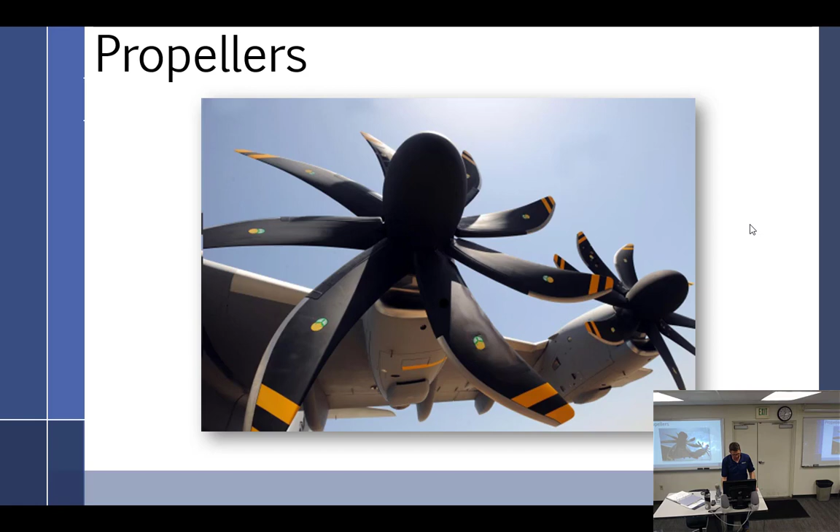We should do it like this. This would be almost fun. So I've never done it before like this. It's hard. Thrust depends upon speed and angle.

Let's see. Thrust depends on the speed and angle at which the blade strikes the air. The angle at which the blade strikes the air depends upon the speed at which the propeller is turning, which would be RPM.

The speed the machine is traveling, airspeed, the speed at which the machine is traveling forward, and the speed at which the air is slipping backwards - that's reverse air. Any one of these changes, it changes the rest, as they are all interdependent upon one another.

Well, that was kind of cool, I guess. But anyway, which is to say that it's a lot more complicated than you're going to think it is. So if you try to make it real simple, it's not - it's going to be complicated. But that's not a big deal. You can just kind of grasp it and go, oh yeah, that is complicated. I kind of see how they're all interdependent, and then you're going to be kind of good.

So let's back it all on up and talk about propellers. Let's talk about the nomenclature. I should define a propeller. What is a propeller? The spinny thing out front. Horsepower to thrust, something like that.

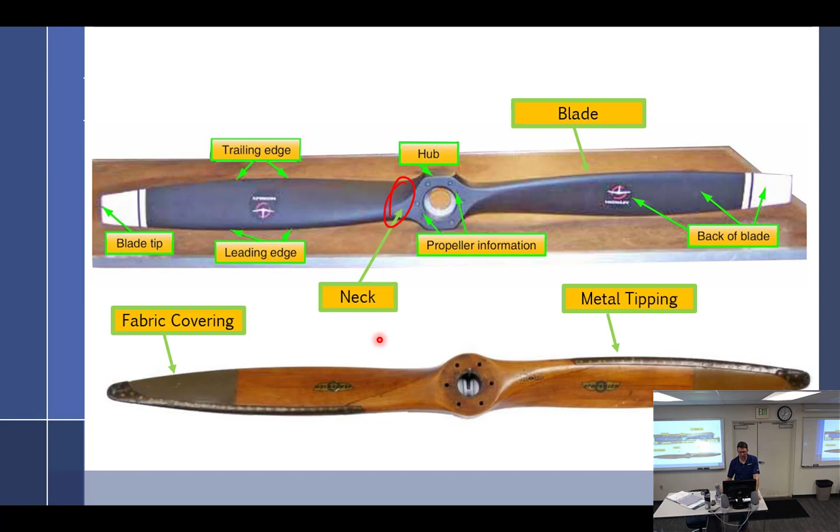I'll get my shit together in a minute. All right.

Oh, it even says it - fabric covering. So they often have fabric covering down here. It stabilizes the tip. I have a little video we'll watch. Has metal tipping - what's the metal tipping for? Debris, debris hits rocks and stuff, protects the wood. It is riveted or screwed and soldered on top to safety it, which we'll talk about that, or possibly nails.

On the metal propellers, we always have a high colored tip. Anybody know why it's high colored out here on the tip? So you can see it. Well, that's what I've got an idea. Yeah, it's how much you can shave it down. That is a great idea. So it's color coded right there for two reasons. One, that's how far you can lose a tip without it affecting you. No, it's not true, that was pretty good though.

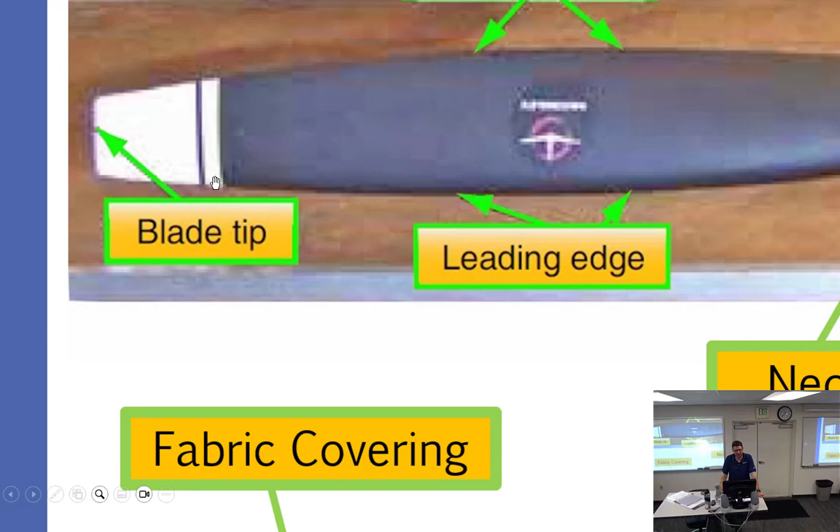No, actually, you ever heard the story about Henry Ford and his Model T? You could have any color you want as long as it's black. And why was that? Production line, cheap production - it was cheap.

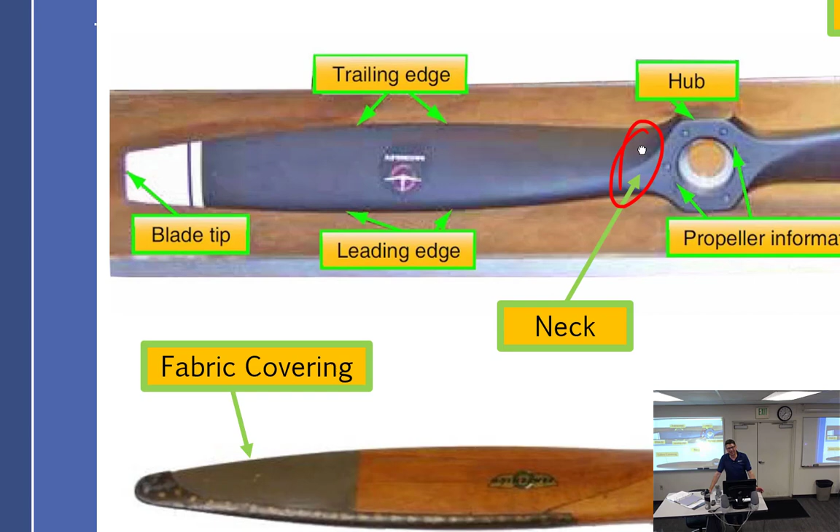The thing about black paint, which was cheaper, is it doesn't stick as well. It didn't have the same adhesion qualities as other colors, though it dried faster. For a car that's not a problem, but for an airplane propeller spinning at a thousand-some odd RPM, centrifugal force causes that black paint to slide off. In the olden days, you'd run the propeller for a couple hours, the paint would start to slide off, and you'd have to trim it and repaint the hub where it started sliding down.

So as technology got a little better, they figured out to paint the tips with a brighter, high visibility color that had better adhesion qualities. That would keep the black paint from sliding off the tip of the propeller, so you didn't have to repaint the hub all the time. You put the white paint on first, and the black paint butts up against it, and it just works.

That's total BS. There's nothing about that that's true.

Well, I hope that's on the test. That's the only part I'm going to remember.

No, why are the tips painted white? So you see it, so you don't walk into it, hopefully. It's a high visibility color so you don't walk into it. Then why don't they paint the whole thing white? Why do they paint the other part?

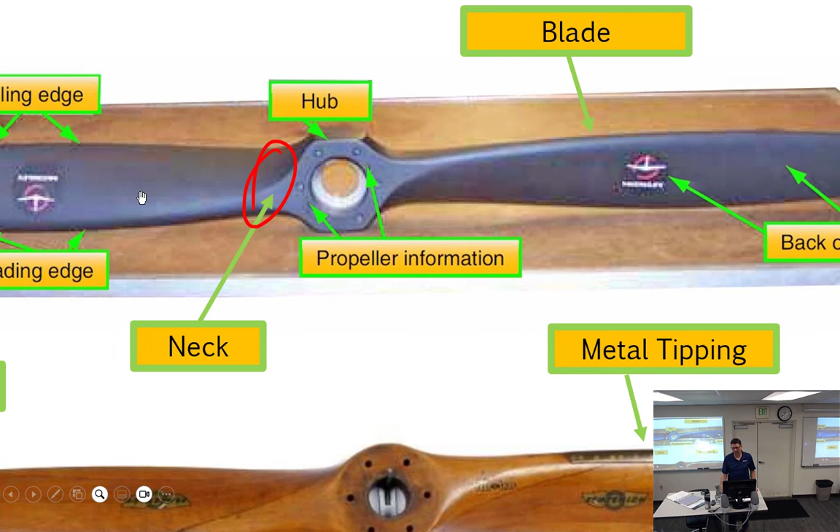Okay, so this part we're looking at is the back of the propeller. If I flip it over, the actual front of the propeller is called the face. The face is the part that faces the pilot. So why is the face painted black? They're always painted flat black - it's hard to see, to reduce glare for the pilot. And you don't even have the white tips on the face side.

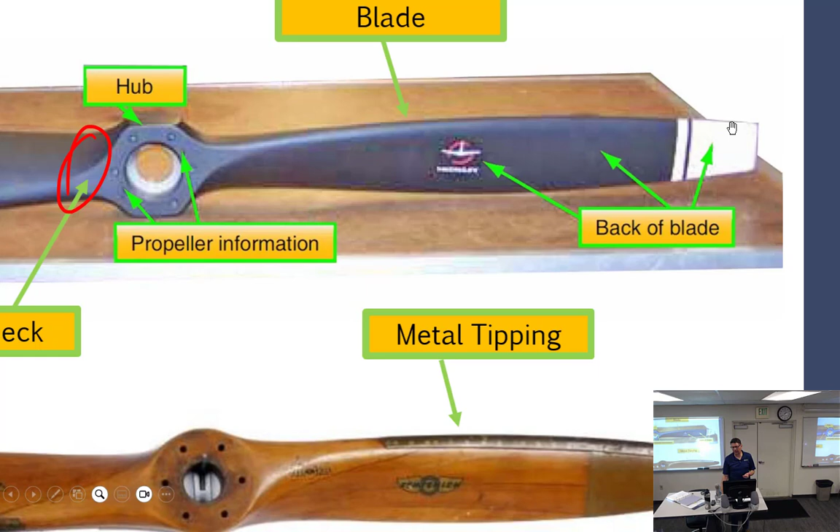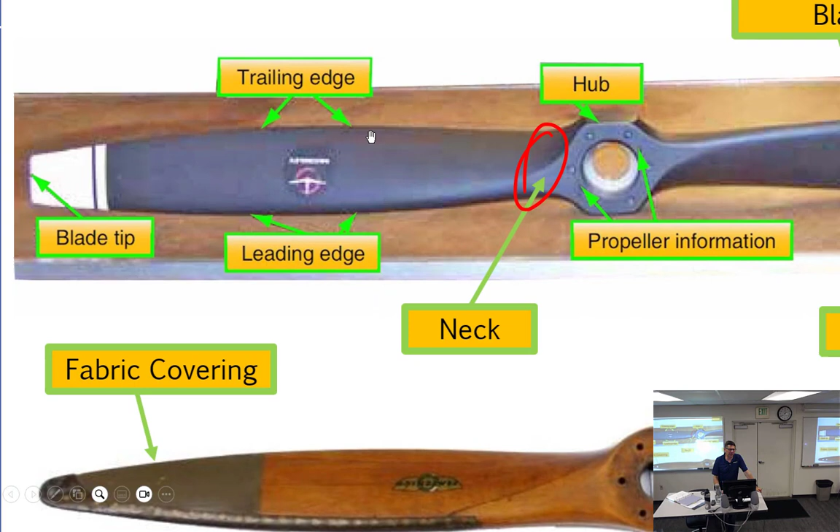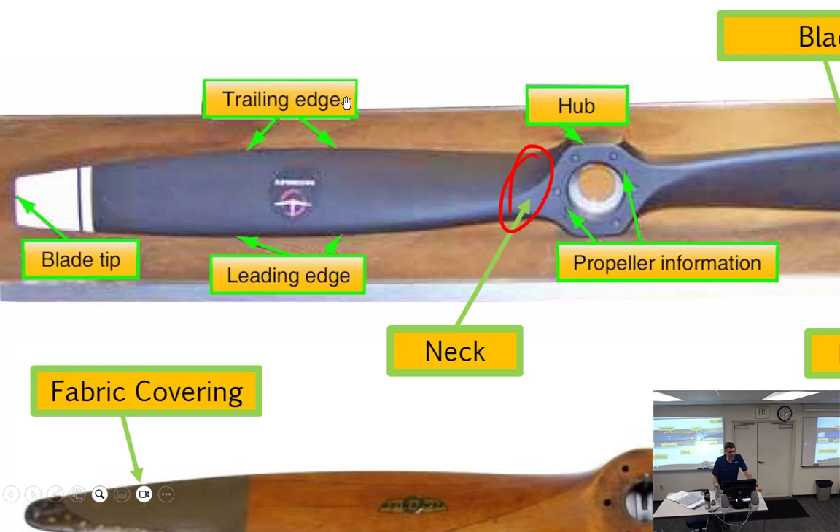I think there's some drawings in the book showing the white tipping on the back. You don't get it - it's called flicker vertigo. I had never heard of flicker vertigo until I had a customer, a crop duster, who ran it through a barbed wire fence and it scratched the hell out of his propeller. He flew it home and said, I got flicker vertigo. I'm like, I don't know what that is. Then he said, back in the old days, you'd go to the picture show, the talkies, the silent films.

When you're watching a film, it's frames, right? And if the frame rate isn't right, it makes you sick from the flicker. So when they first came out with these movies, people would get sick from watching it.

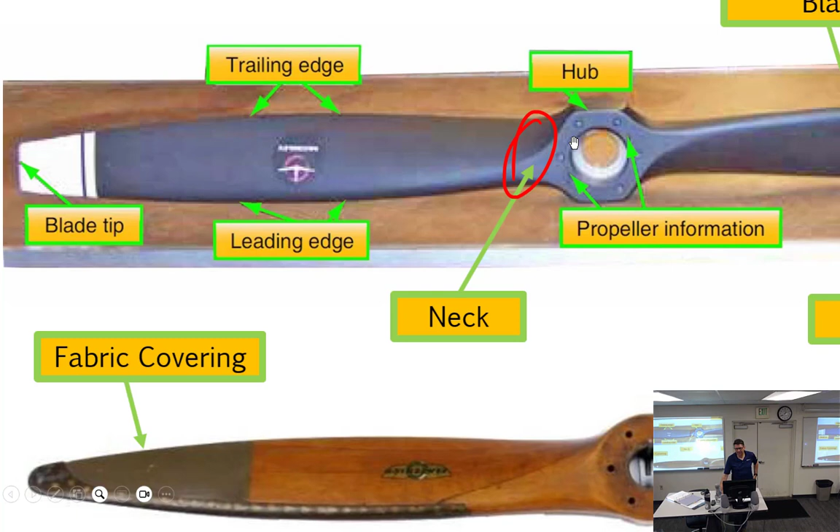Flicker vertigo - is that also real? That is real. Pokemon was like that. Yeah, they came out with an episode like that.

Everything except the paint sliding was true. Well, we were cold - I wouldn't lie to you guys.

All right, nomenclature, things we talked about. We have the blade - you should know what the blade is. We've got the neck, next to the hub. Next to the neck is the hub. What's inside the hub? The hub bore. It's a funny name to say. And we have the bolt holes.

Bolt holes are kind of a big deal - if you're going to get a crack, it's likely to start at the bolt hole. They're a big deal, especially in wood props. You can't have them elongated, or the prop will have play to it. That'd be bad. We have the leading edge.

The leading edge goes forward and into the wind. Wood props - I'm going to say props instead of propellers to save time - have metal tipping.

The metal tipping protects from rock chips. Maybe also rain - I hear when you fly into rain it's really hard on a propeller, so it protects against that too. I'm not that familiar with it getting past the lacquer into the actual wood.

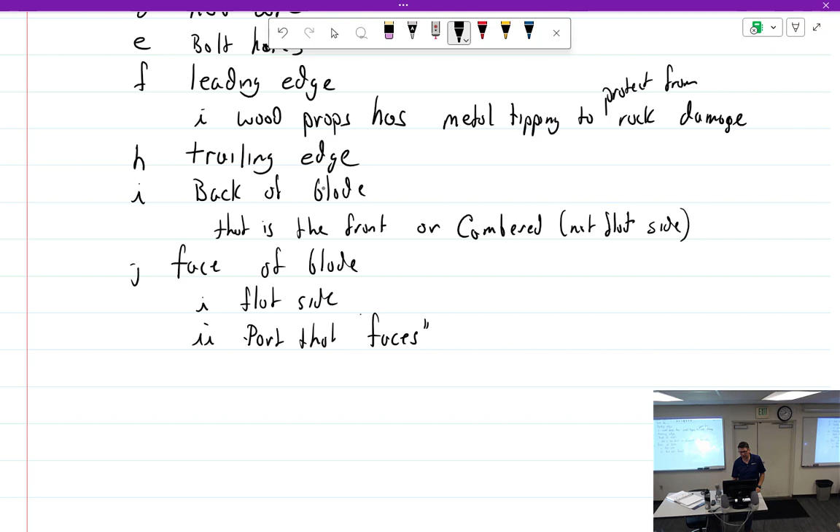Assuming it's a tractor type, meaning the pilot's in your front. If you have a pusher type, it's in the back. I guess it still faces the pilot, kind of. No, because you'd have to get out, walk around, and then face it. It faces the back of the pilot. Yes.

The blade chord. What is the blade chord? Leading edge to... the imaginary line. I don't know why it's imaginary, it's a real line. So it's the line between the leading edge and trailing edge.

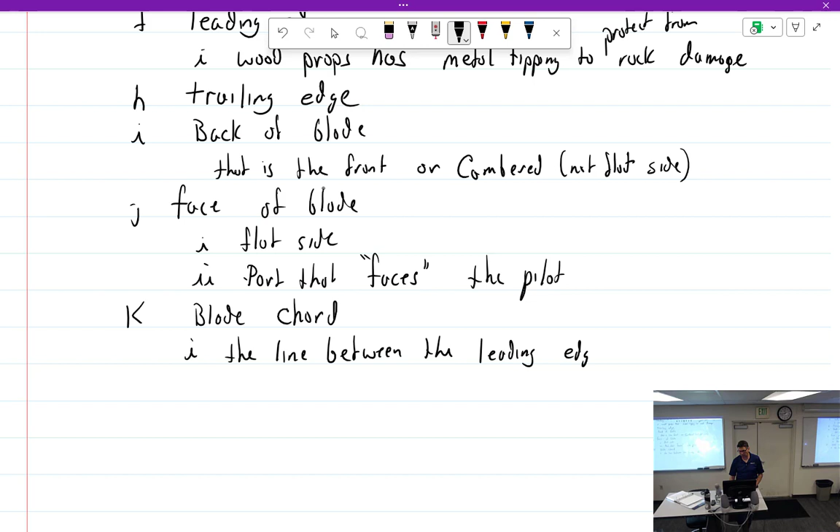Where else do we have a chord line? Wings—between the leading edge and trailing edge. I remembered it.

Blade station, that is a distance. Well, it's always been said in inches, but we're getting more into the metric system with blades coming out of Europe. I wonder—I haven't read a manual for that. It would seem like it'd be in millimeters or centimeters. A distance in inches from the center of the hub.

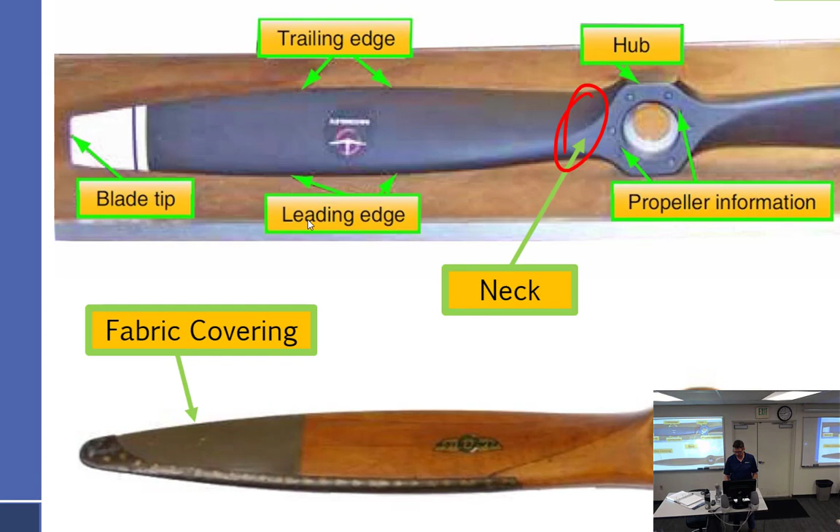Should do more. All right, blade stations. So I have all... oh yeah, we have the blade butt down here. That's the blade butt, but these are removable blades—we're talking about fixed pitch. But if we had a removable blade, then it has a blade butt.

Each station is a number of inches from the center of the hub, which is not shown on this picture because it's the actual blade that's been taken out—constant speed blades, they come out, they're not one piece. Then the blade center would be away from it—we'll get into that later. So anyway, we have a station that is number of inches past the hub centerline.

All right, prop theory. So as Orville said, a propeller is a rotating wing. We know how a wing works, right?

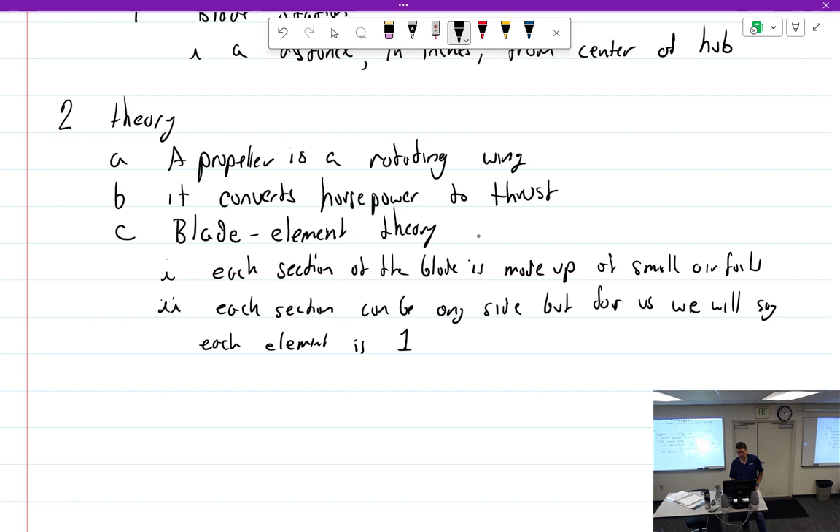Each section is of the blade. The blade is made up of small airfoils. Each section can be any size, but for us, we'll say each element is 1 inch.

The theory states that many airfoil sections or elements are formed together to create an airfoil blade that can create thrust when rotated around a central plane.

Each element is designed to operate at its best angle of attack since each section moves at different speeds, which is a weird thing. Wait a minute - what do you mean each section moves at different speeds? It's all moving forward at the same speed and going around at the same RPM, right? But as you get air further out, each section is going at a different speed when you clock it around this way. The tips are going faster.

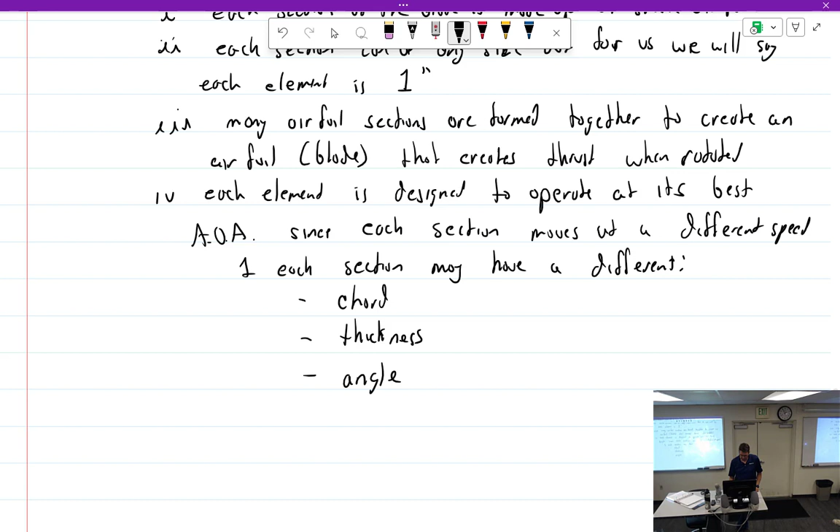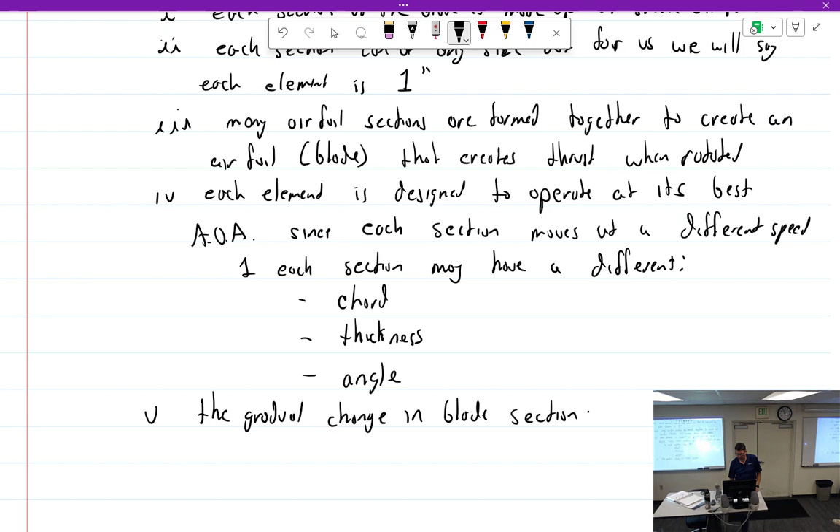The gradual change in blade section angles is called pitch distribution, which is the noticeable twist in the blade.

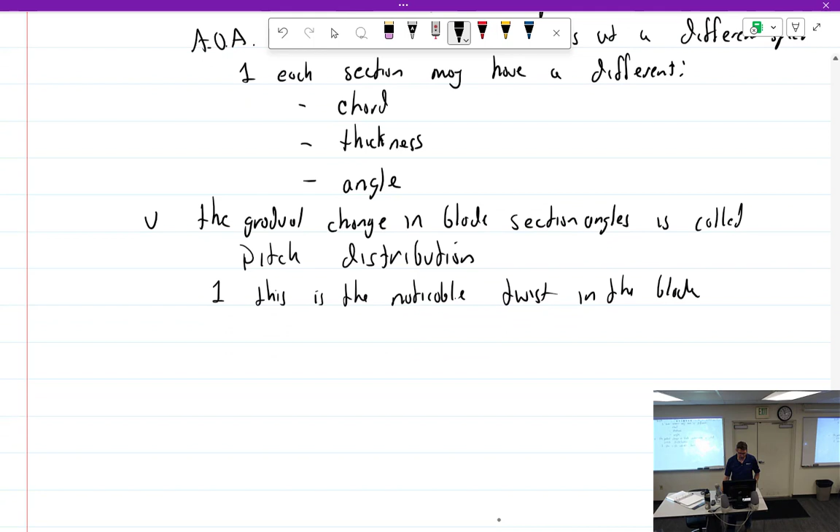What makes thrust? What makes lift? The difference in pressure created by the airfoil going through the air.

So what makes lift - is it one thing or two things, or three? Two main things: Bernoulli's principle and Newton's principle.

Now here's a fun thing - you guys have it rough, you have to remember twice as much as I had to remember, because when I was in A&P school, it was only Bernoulli's principle. Was Newton not alive yet by then?

And well, you were there with me. God, we had a guy in my class. I kept saying, well, you were there all the time doing this.

But yeah, if you go back to the original textbooks, we didn't have the 8083s, we had AC65s. I still have a copy of that, and it was all Bernoulli - that was the only guy who made lift happen.

Let's see. Stick and Rudder. Not that you guys ever read books, but dude, that book is the best. Honestly, if I should read it again, I think it should be mandatory to read. I was close, $20.

Langewiesche? Yeah, very good. Told you, I was really close. Langewiesche, yeah, because the W is a V.

If you're going to read a book, it's a good book. How many pages? I got mine for free. It's about that thick, and I don't think there's a lot of cartoons in there. No, there's not that many words per page. That's all I read. Yeah, read a fifth grade novel.

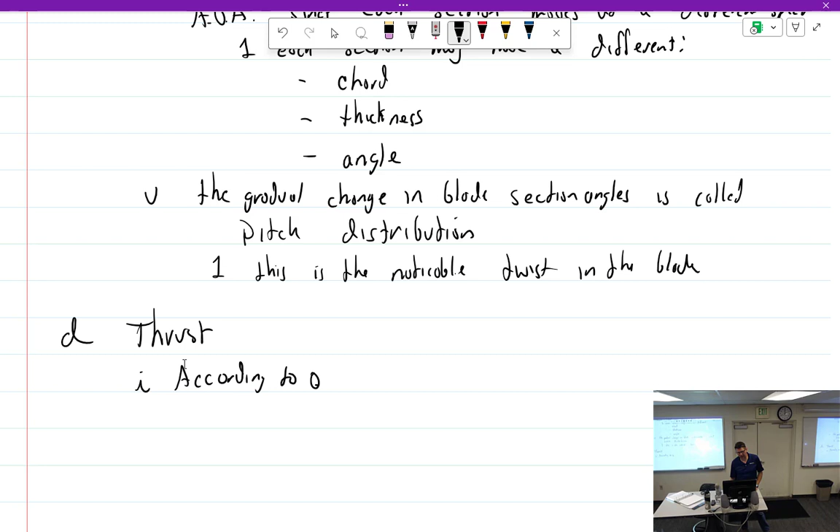So anyway, we'll talk about thrust. Of course, there's something about this that I didn't like, so I put 'according to Q&A.' I always know when I put that, I don't trust any Q&A.

Thrust is produced by a rotating propeller in the same way lift is produced by a wing. They go on to say an area of decreased pressure - low pressure is produced immediately in front of the prop. That was your Q&A. Aerodynamic forces cause the propeller to move into this area of low pressure.

Nick, why don't you tell us about Reynolds numbers? I thought for sure he would just start talking about it. Are you familiar with them? I think I've heard of them. Yeah, when you talk about airfoils, you get into this Reynolds number.

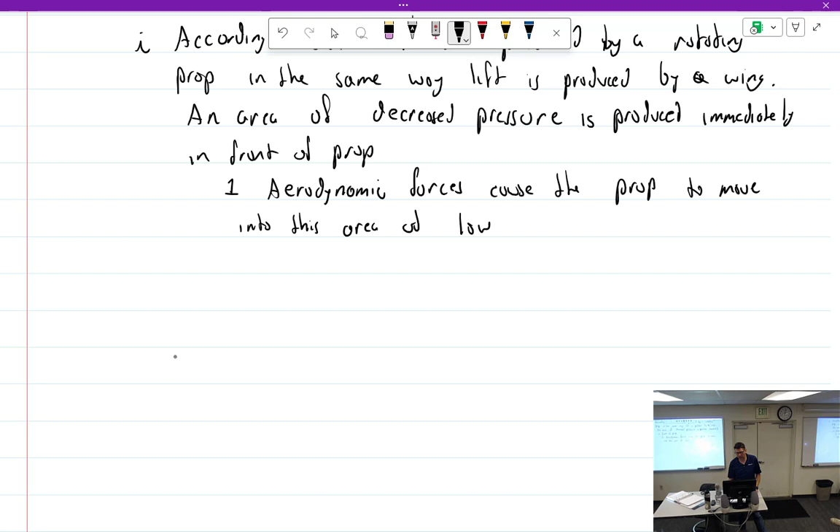So according to Q&A, how does a prop work? Well, the prop spins around, creates a vacuum in front of the engine, and the airplane is sucked into the low pressure. That's what it sounds like. Now you know why I put according to Q&A.

Then I wrote some textbooks, because some don't. Add Newton's third law. I think I said nude law, didn't I?

Is when you eat the last cookie. For every - what do you tell me? For every time you give a mouse a cookie, he'll ask for some milk. Every action - that's close enough.

There is an equal and opposite reaction. And we see the two are directed along the same straight line.

Same straight line. So what is that with our prop? Action one. Action one, what happens?

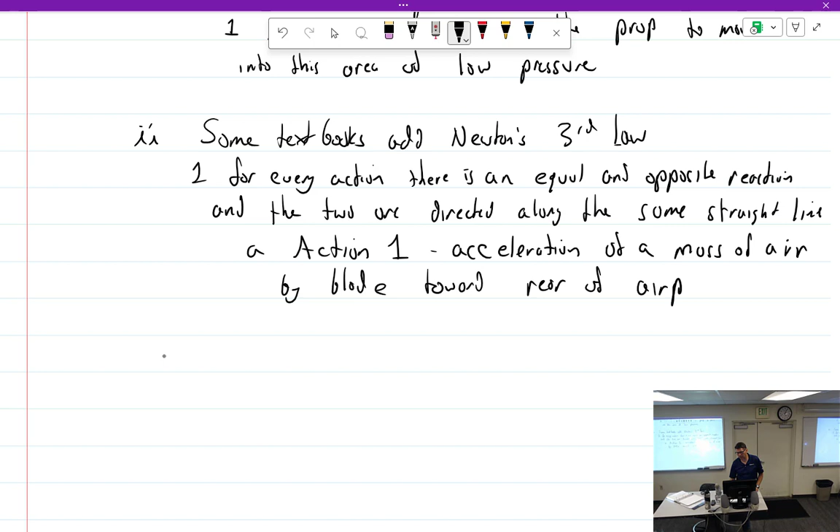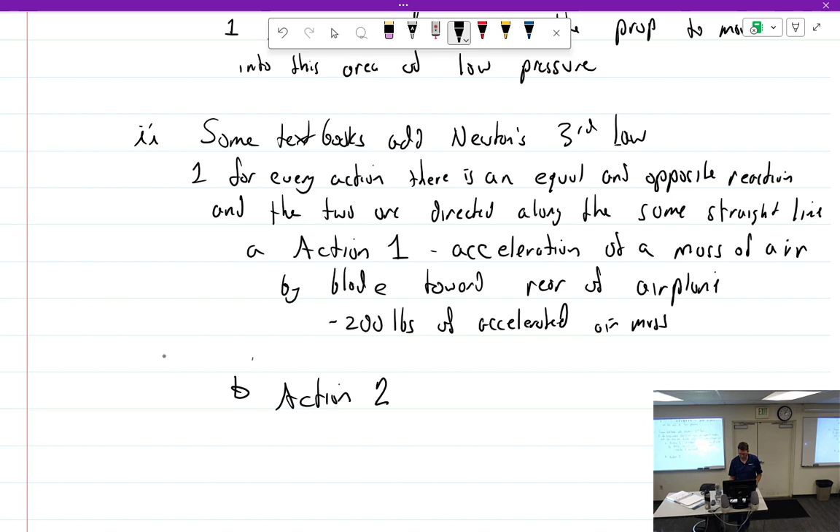Hot dogs. So, what is action 2? Release. The plane is pulled forward. With how much force? 200 pounds of pulling force.

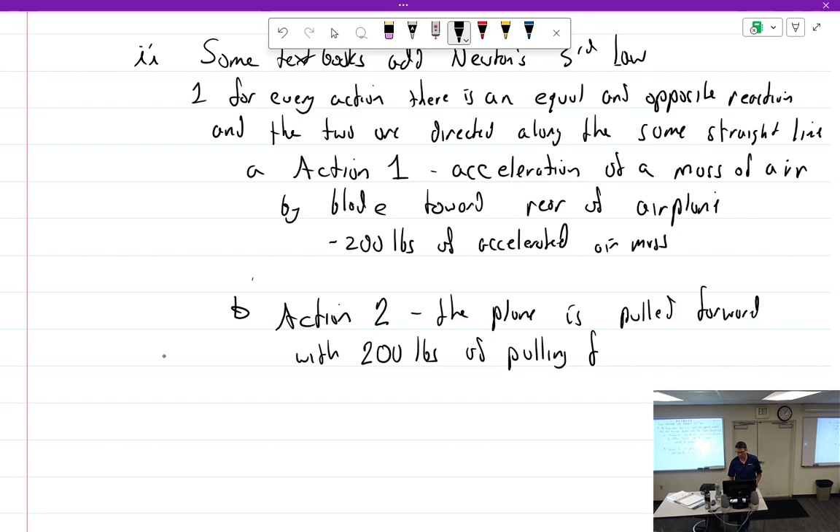So you have your two things. Airplane flies and it goes forward. That doesn't make sense if you're saying it seems like we're combined to make 400 pounds of force.

You're trying to say the equal and opposite. Equal and opposite, it's got to be equal. Oh yeah, it's got to be opposite. Sorry. Damn, Newton, if you would have just thought about it that way, we'd be going twice as fast. I know, double it. Double it. All right.

They hadn't invented gravity. Blade angle.

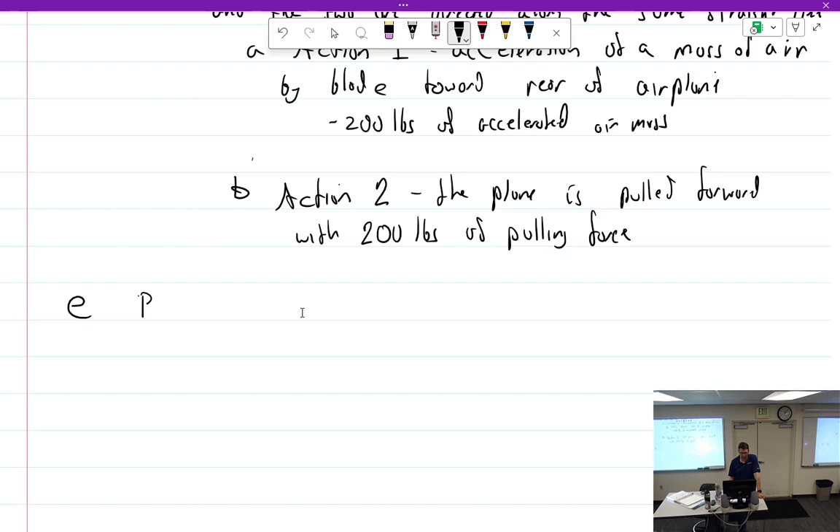Got our blade elements. All right, blade angle. Everybody in aviation tends to use the terms blade angle and pitch synonymously and interchangeably. They're not the same thing, but I'm not a real stickler if you use it in the right context, and I can understand what you're saying, since I tend to do it myself.

I'm sure you've probably covered the difference between them. I wasn't, I was just going to leave it at that and move on. The difference then: pitch is like how the actual aircraft is oriented with the propeller attached to it, versus angle is the angle of the propeller relative to the hub. Oh, no.

I think you were close. Blade angle, can I write the definition? Yes. Okay, wait, can we all guess? We're going to go around the room, and I want everybody to tell me what you think it is. This is going to take some time.

So, all right, blade angle. What did you say it was? Blade angle is the angle of the blade relative to the hub. All right, blade angle relative to the hub. Okay, we'll see if he's right.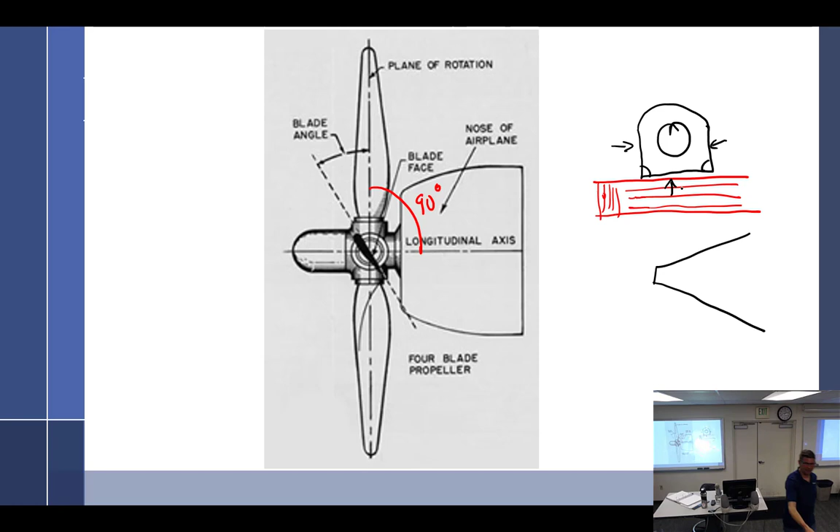So he's got a taper flange, because he does. Oops, I forgot it does that. And so it's tapered. Where are you gonna put the protractor there? Not that much. Keep in mind that the protractor has got two 90-degree angles to it, so you can use all three sides for this. I don't recommend ever putting it on the front of a propeller like this, because when you look at this, it's been beat with a hammer, so not a good idea. I would put it here and double check it here. But I don't think I've ever seen a taper crank with an adjustable prop, so it wouldn't matter. Oh, I guess that only matters for this.

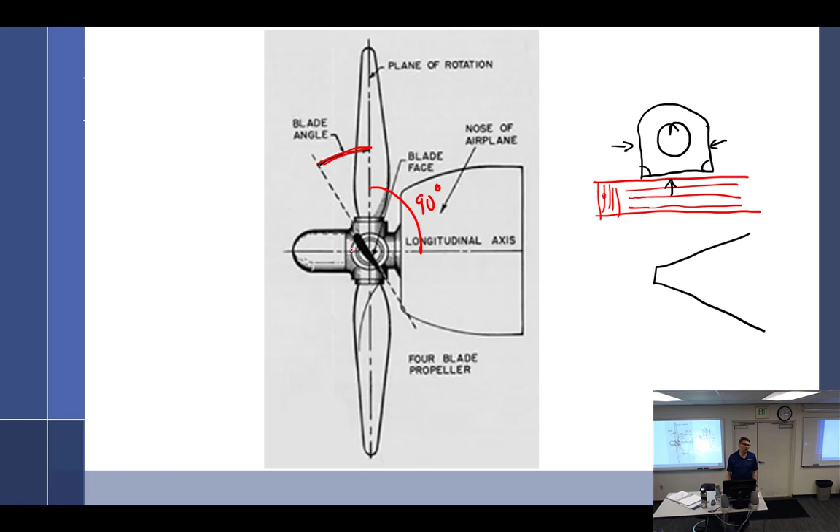All right, so the blade angle is what? The angle between the chord line and a particular section. So that is the blade, how it's angled. But we also call that pitch. So what's the difference? I'll tell you the difference when we get there. Do I even get to there? It's about 5 letters.

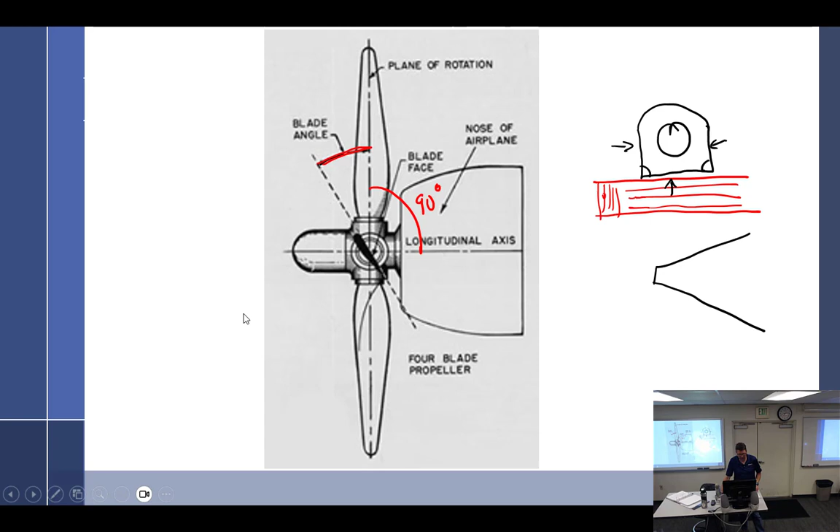All right, blade angle. To create thrust, a blade must be set to a certain angle to the plane of rotation.

What happens with a wing if the angle of attack is too high? It stalls. Same thing with the prop. So you've got to get your angle of attack right, otherwise you stall out the blade. What happens if you stall out the blade? No thrust, doesn't work well.

So if we had a blade that had the same angle all the way down it, then part of it would be stalled and part of it wouldn't. Then you get into some weird things with some blades. There's videos out there that show blades in motion and actually working. They're fluid, it looks like they're made out of rubber, these things move all over the place. And you could see one that gets near supersonic when it starts setting up pressure waves across it. It is scary looking, and then they come apart. So they've got to be designed quite correctly.

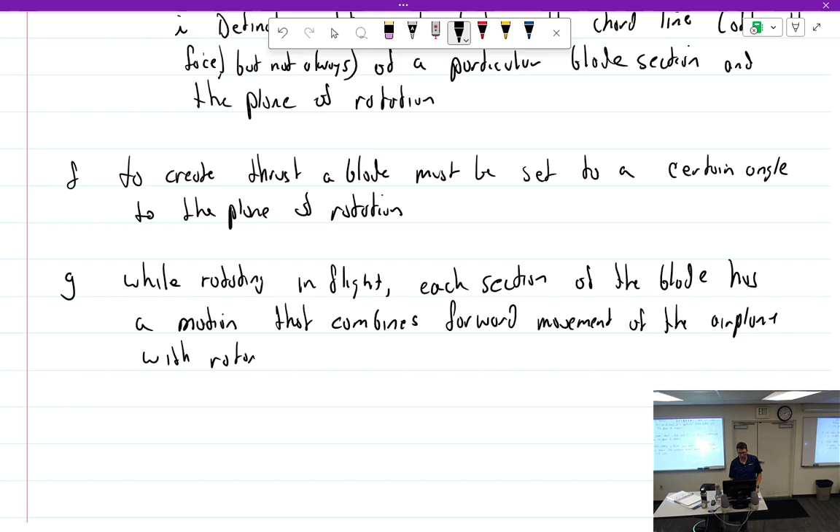All right, keep that in mind. Circle back around in a minute.

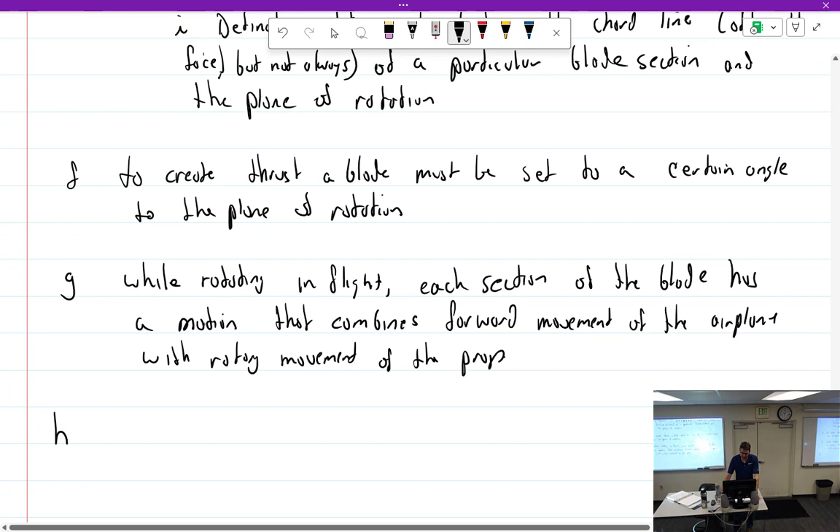Now we will talk about pitch. So the blade has a path through the air like a corkscrew.

And for those of you who aren't alcoholics, like a screw, since you know what that is since we work on airplanes. What? Yeah, he has a knife, or a knife and corkscrew combo. I always have a corkscrew, always have that, because if you have a beer you can figure it out, but if you don't have a bottle opener and you have a bottle of wine, you can figure it out.

The amount of bite the blade takes is determined by the blade angle. What's the blade angle? Blade angle is the line from the chord line to the blade, chord line to plane of rotation. So the amount of bite the blade takes is determined by the blade angle. If it is a high pitch, it's a big bite. And if it's low pitch, it is a little bite. Or fun size.